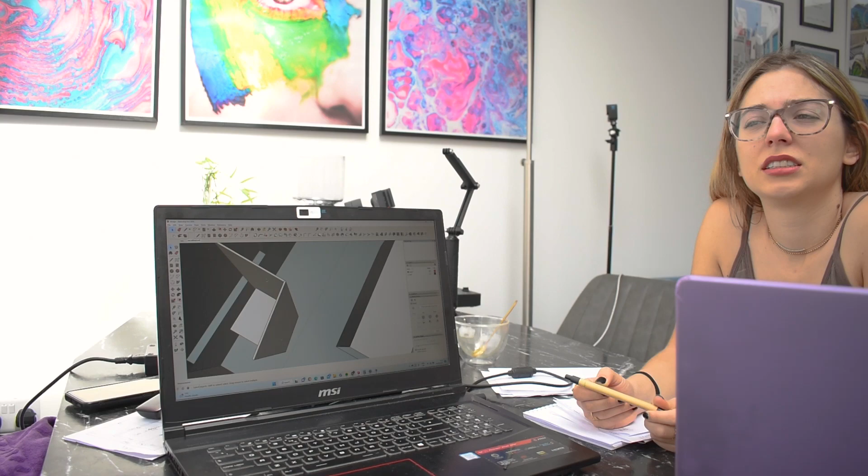Another piece of the puzzle we have to figure out was our bed. How big should it be and which way should it face?

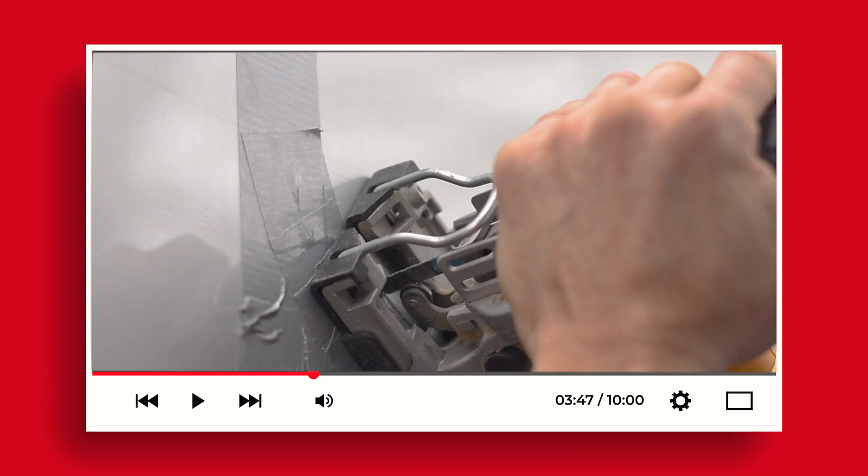Today we'll be diving back into our layout design, shaping our dream space one step at a time. To bring our vision to life, we use SketchUp to create a 3D model of our van's interior, which allows us to experiment with different layouts and visualize how everything will fit together.

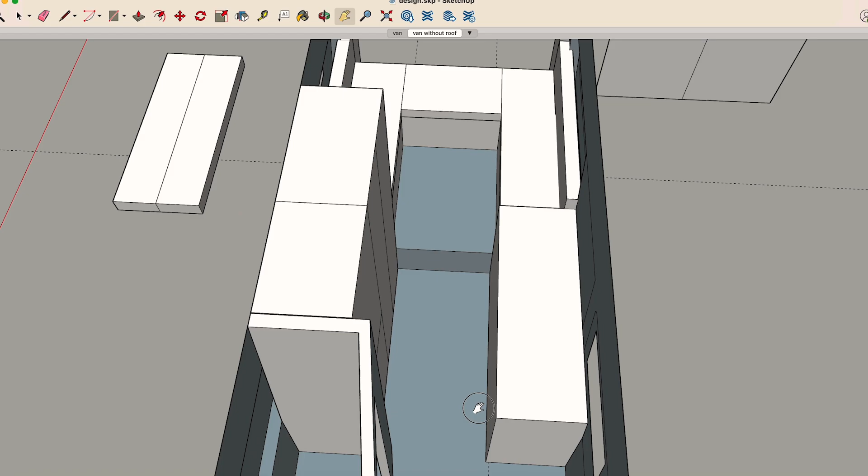Alright then, let me walk you through the design. Our new home is a long wheelbase van, specifically an L4H3, so it's pretty big. In fact, it's the largest Transit model you can get. Now, considering we bought a big van, we knew right away that we wanted a shower bathroom area, but we were still unsure about the dimensions.

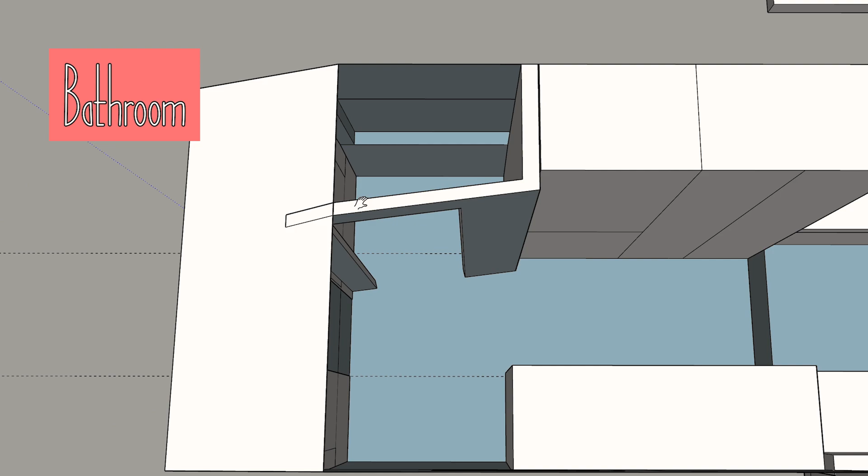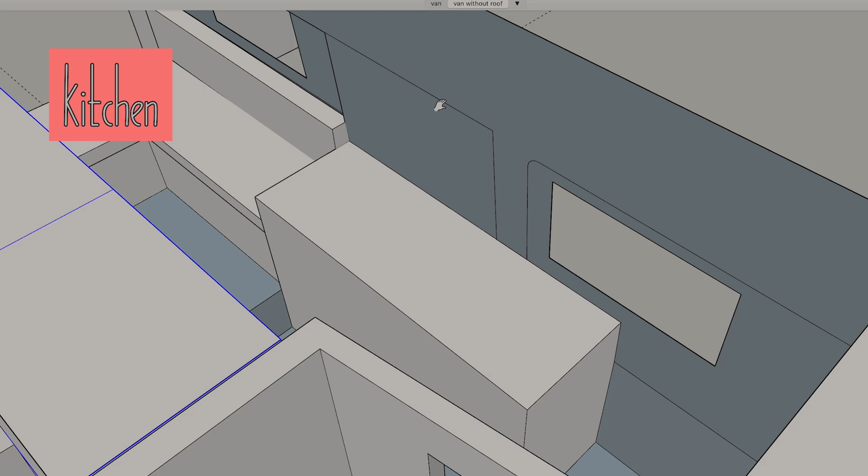And of course, we wanted our van to feel open and spacious, but we also had to take the storage needs into account. After some discussion, we settled on the idea of 3 full-size wardrobes on one side, right next to the loo. Across from this, we'd have the kitchen, as open as we could make it. We're still on the fence about whether to go for cabinets or open shelves above the worktop though. Liam was keen on having worktops on both sides, but frankly, we just need the storage.

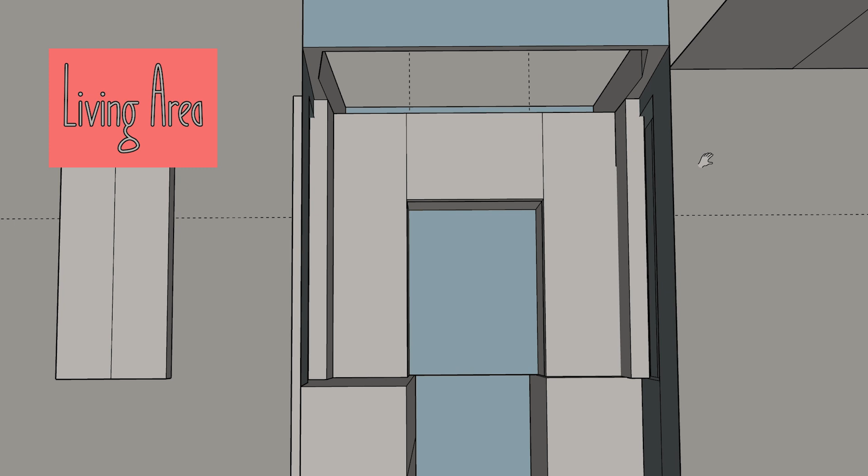Plus, we are confident we can create a sense of openness in the living area. This space will be our chill-out zone and workspace, and come night time, it will transform into our bedroom. Yes, it does mean we'll have to make the bed each morning, but honestly, that's not such a bad habit to get into. It gets you up and moving, and having a fixed bed, well, it will just make the place feel cramped. We learned this the hard way when we rented a van in Sardinia last year. The fixed bed in the van had us getting on each other's nerves due to the lack of space.

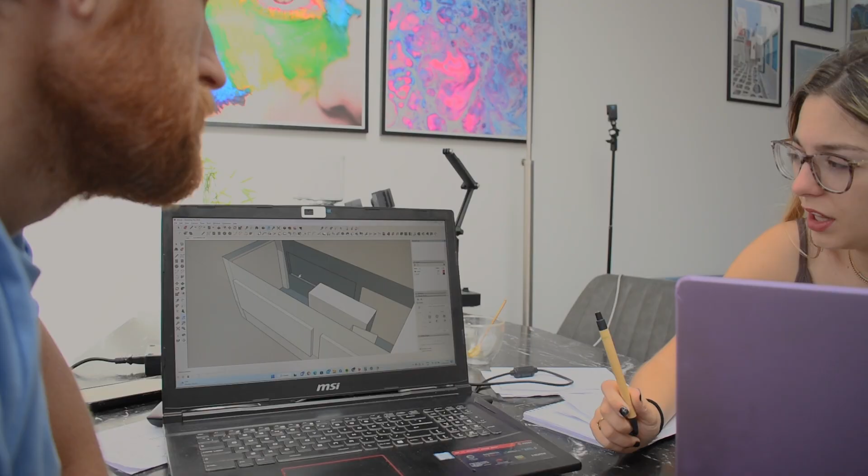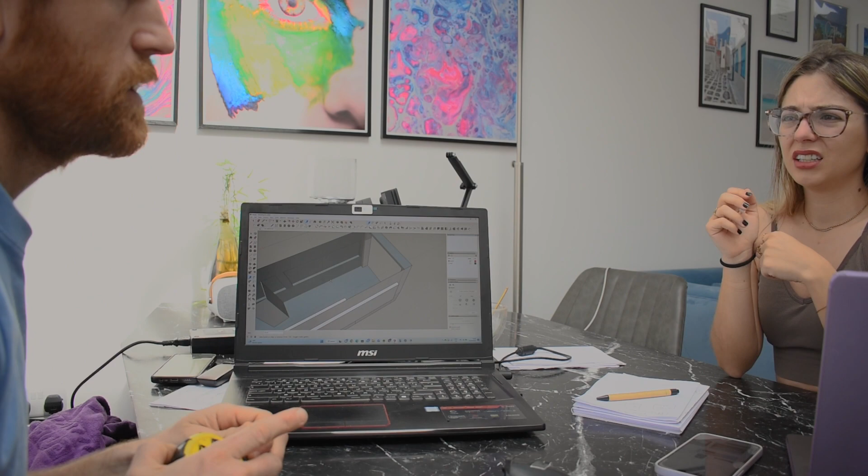We are determined not to repeat that mistake in our dream van. To be honest, this one was pretty straightforward. As soon as we realized we could sleep sideways in the van, using the recess of both sides to get the extra space for our head and feet, we knew this was the way to go. So we decided on a bed measuring 1.9 meters by 1.5 meters. This space area will also be our sofa, just in a different form. It's all about making the most of the space we have, and this design really helps us to do that.

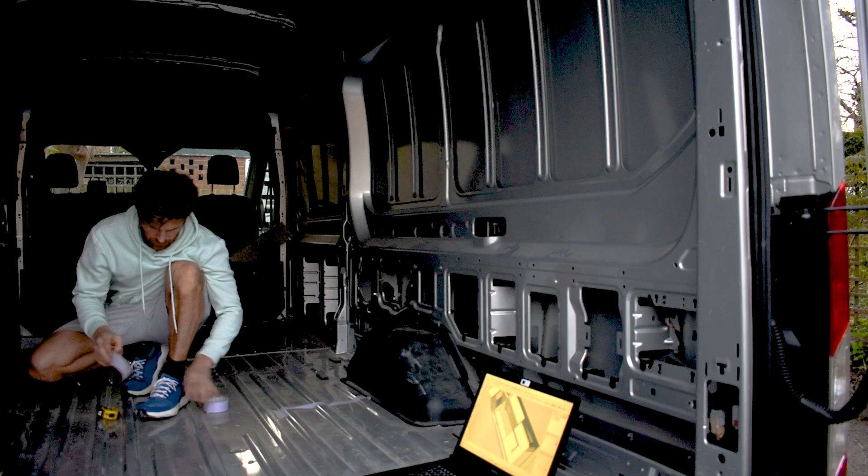Putting all the dimensions in the software in SketchUp, and now we are at the van. We are just gonna put rough markups everywhere just to know where all the areas will go. We need to make a decision on the windows, the position, and the dimensions, because we need to get that sorted ASAP.

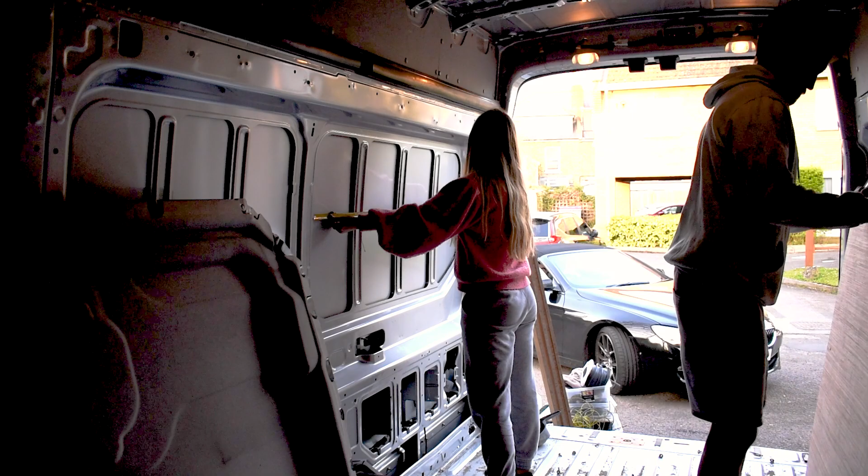Next, we have to discuss where to place the windows in our van. Considering factors like natural light, ventilation, and aesthetics, which is quite important for us, we decided on a window in the sliding door, 2 windows on each side of the van at the back in the living area, and 2 windows in the back doors, and 1 roof window.

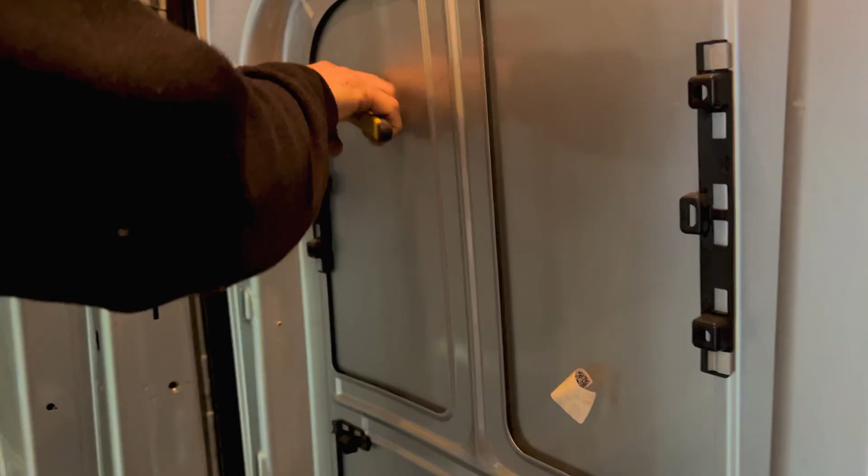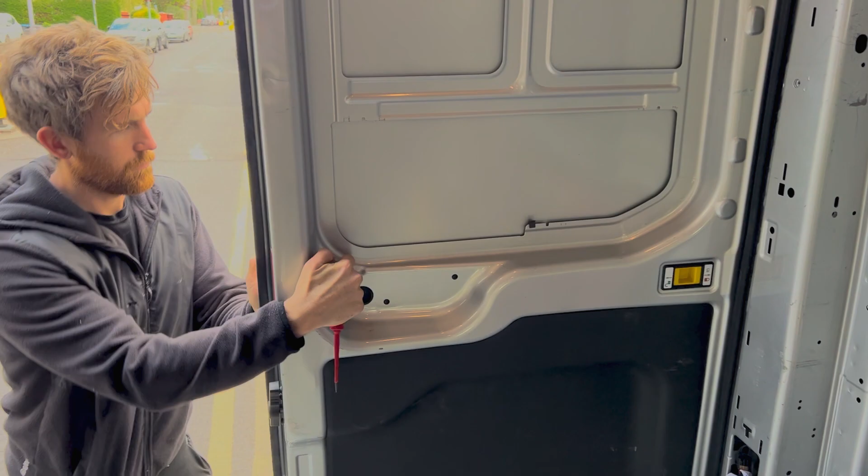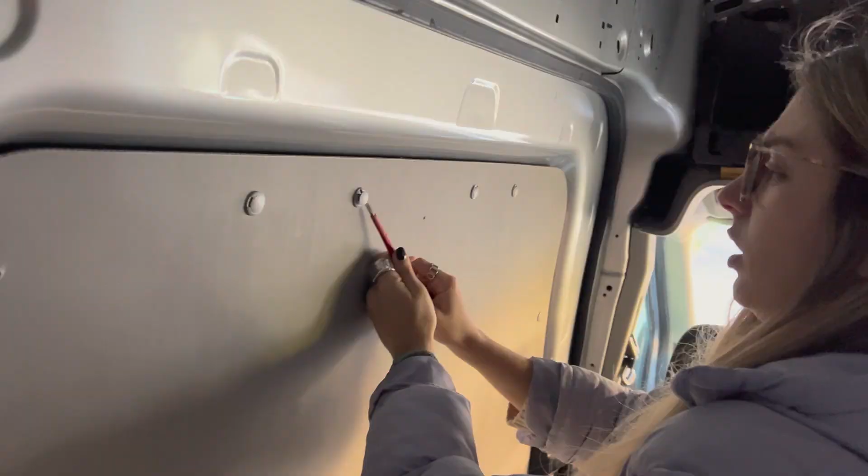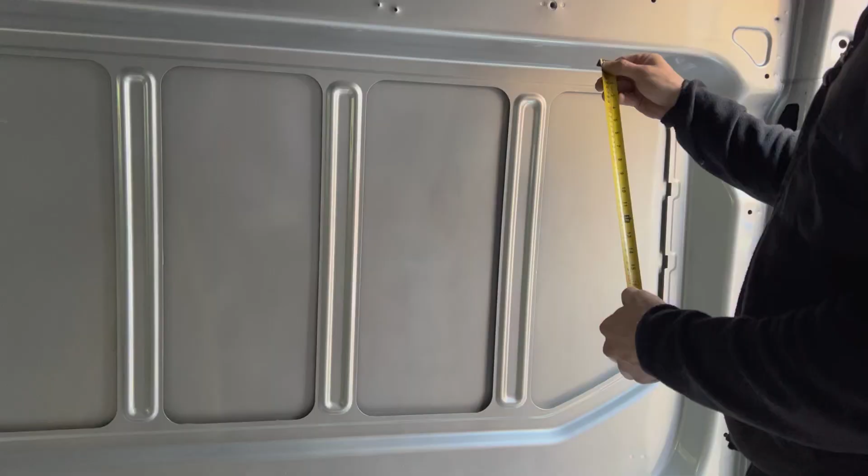Now, this step is absolutely crucial because it's going to guide us on where to position important equipment like our sunroof windows and our Maxxair fan. And not to forget, it's going to decide if our solar panel will fit well enough or not.

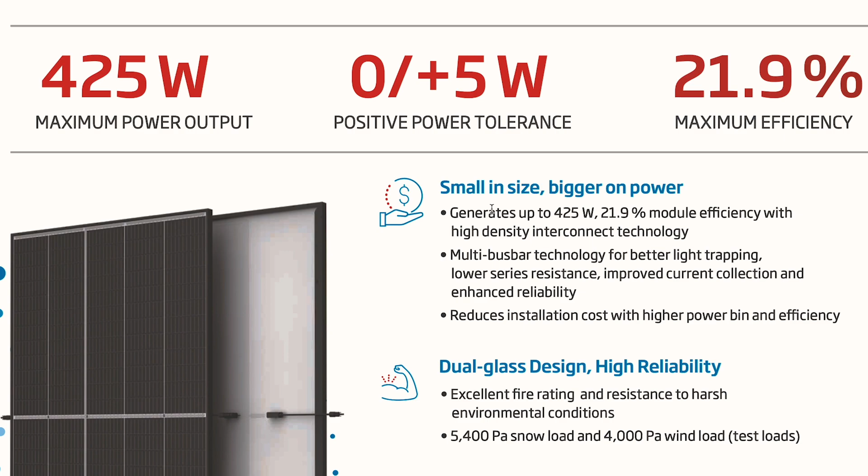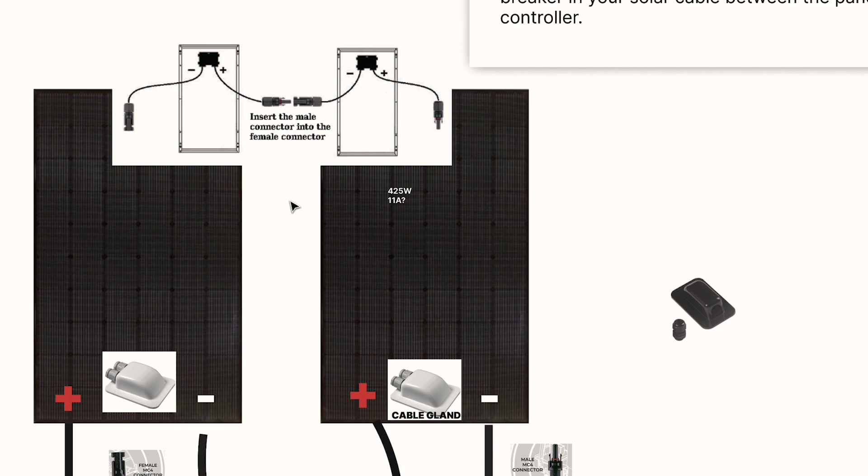Now, speaking of our solars, we are not going for ordinary ones. We've set our sights on two high-performance 425 watt panels. Yeah, you heard it right, 425 watts. We're talking power to the next level in this setup, and trust me, this is not your typical rig. We are super excited about our electrical system and we can't wait to share the details with you.

Now, back to the panels. They are pretty sizable though. They are 1.77 meters by 1.1 meters and 30 mils thick. As for our van, it's 3.75 meters and 1.6 meters wide. So, and we want to mount the panels widthwise, which means they'll hang over the edge a bit, but we really need to make this work.

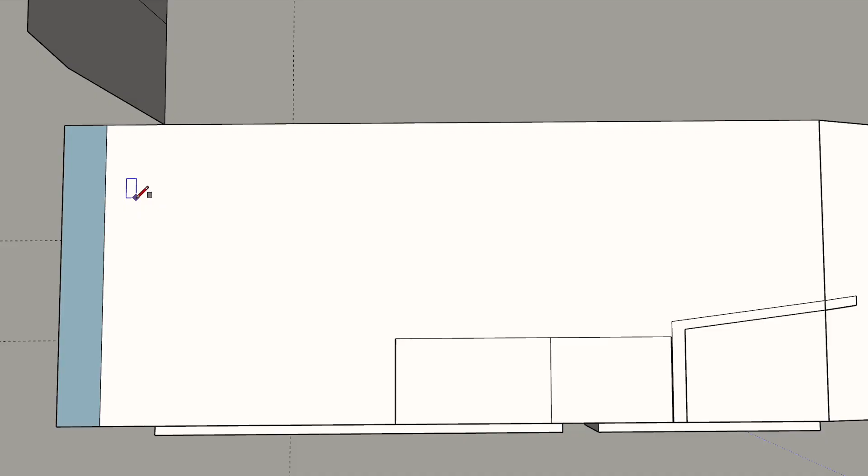So with this arrangement, we will have enough space for a sunroof window on one side and a Maxxair fan on the other side. And I saw that most people go for the 40 centimeter Maxxair fan, but they actually make a slightly smaller version, I think it's 35 centimeters. And it's perfect for us because the space is a little bit tight. Anyway, we're still figuring out the details of the installation, but we are committing to make it work.

Fit a window, put one panel there, and fit something else like a fan. So we could have a window here, and a panel here, and a panel in the middle, and the fan there. I mean, yeah, that was just...